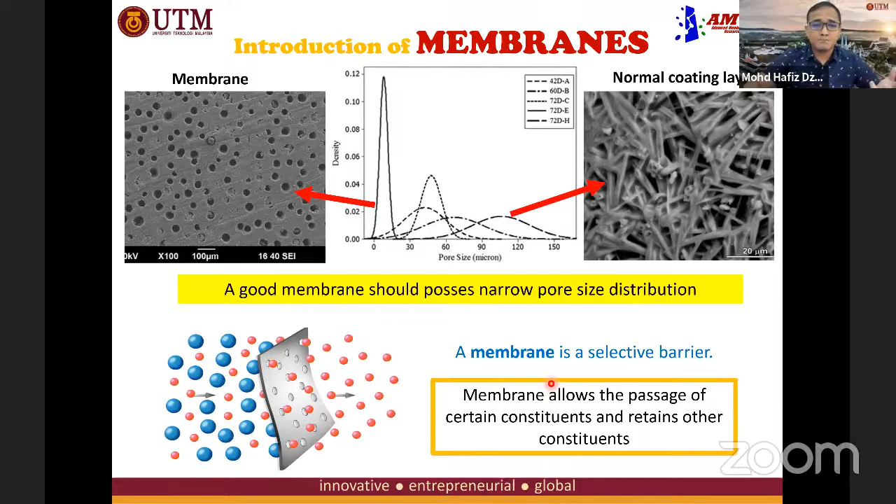Due to its narrow pore size distribution, membrane acts as a selective barrier, meaning that it only allows certain constituents to pass through and retains the other constituents. The concept of a membrane is quite straightforward. The conventional mechanism of membrane is based on filtration. Membrane allows molecules smaller than its pore size to pass through and retains the bigger molecules on the retentate side. Therefore, the pore size of the membrane is really important to make it very selective and increase the separation efficiency.

If you look at the classifications, the most common types of membrane are these 4 types: microfiltration, ultrafiltration, nanofiltration, and reverse osmosis. Microfiltration has the biggest pore size, from 0.1 up to 3 micron, followed by ultrafiltration, 20 nanometer up to 0.1 micron, nanofiltration, bigger than 1 nanometer and less than 20 nanometer, and reverse osmosis, the smallest one, from 0.1 up to 1 nanometer.

It's very, very small. Therefore, reverse osmosis can reject all the molecules in water. Only water can pass through, because the contaminants in water have a bigger molecular size compared to H2O. H2O has the smallest size, so only H2O can pass through, and it will retain all the minerals and contaminants on the feed side.

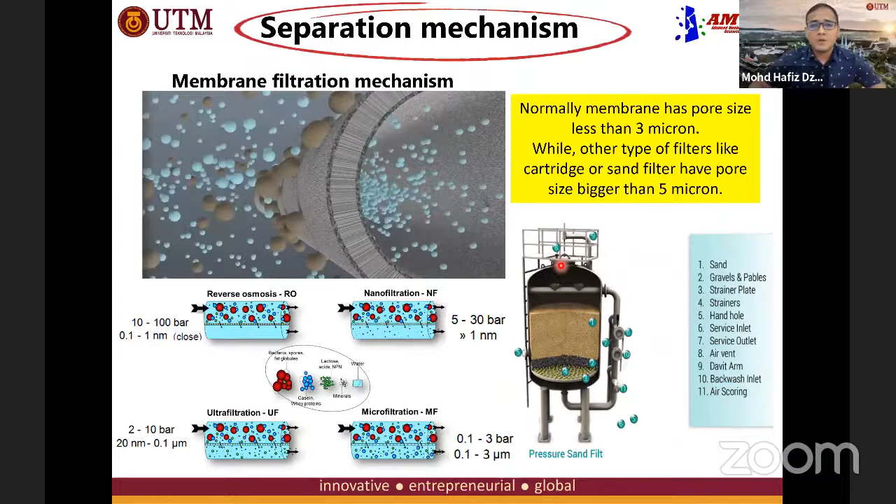We also have another type of membrane, which we call the inorganic membrane. The inorganic membrane is divided into three: ceramic membrane, carbon membrane, or metal membrane. The commercial one is made from alumina and zirconia as well as titania. This is the common material for inorganic membrane, which falls under the category of ceramic membrane.

And there's a new type of membrane. It's not so new, it was invented probably a few decades ago. What we call the mixed matrix membrane. Mixed matrix membrane is a combination of the polymer and the inorganic membrane in order to cater to the disadvantages or drawbacks of both materials. When we mix them together, we expect some synergistic effect between the polymeric and inorganic combination.

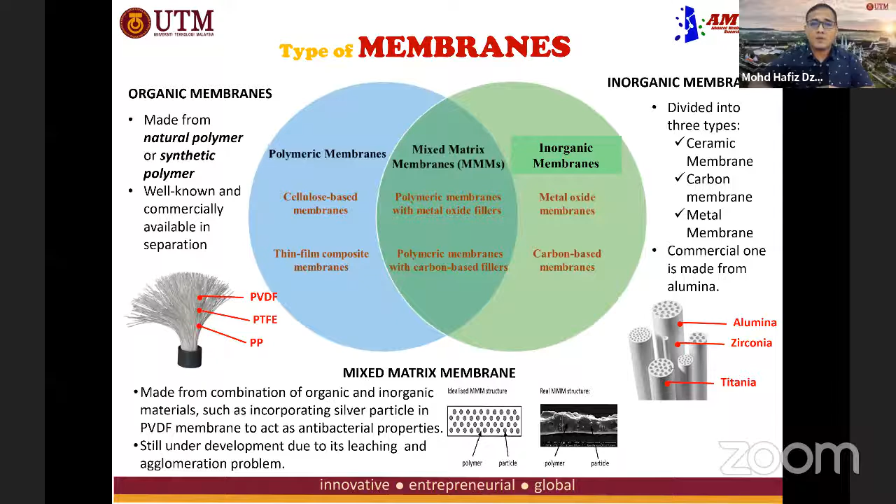But the mixed matrix membrane has not been much commercialized yet due to its leaching problem and also the agglomeration issue. So the two most common membranes in the market are polymeric and ceramic.

For ceramic, it has advantages in terms of its superior mechanical strength and its good chemical and thermal stability, because the nature of ceramic itself is very, very tough. Therefore, the ceramic membrane has a longer operation lifetime. Normally, we can use ceramic membrane up to 20 years, compared to the polymeric membrane, which degrades over time, so we have to replace it periodically. Normally, every 2 up to 4 years, we have to change the polymeric membrane.

But the main shortcomings of ceramic membrane are that it is very expensive and brittle. Because of these two drawbacks, ceramic membrane lacks operational experience in industry. People tend to use polymeric membrane instead of ceramic membrane because of its expensiveness and its brittleness.

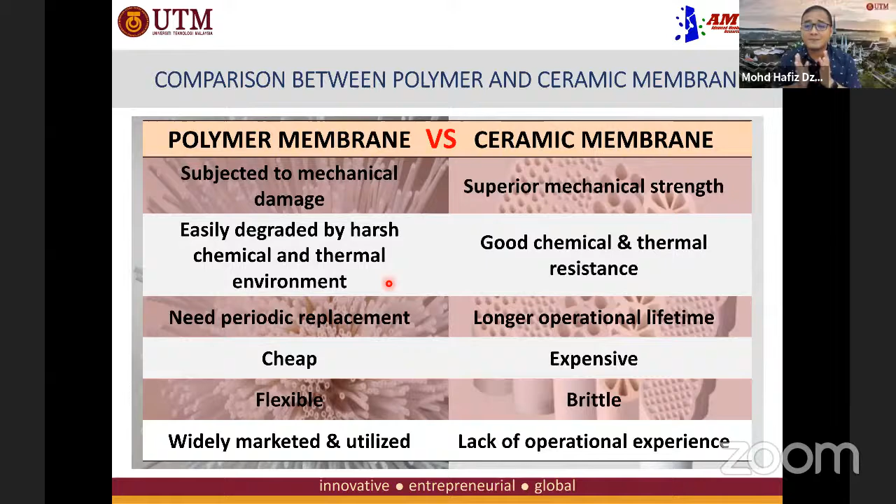The common structure of ceramic membrane is what we call the asymmetric structure. Asymmetric means that the top and the bottom layers don't have the same structure. This normally consists of several layers of one or more different ceramic materials. For example, the thickest layer is the porous layer that gives the mechanical strength and acts as a support for the membrane. That is followed by an intermediate layer. After that, you coat a separation layer in order to alter the pore size of the membrane.

For example, if you would like to produce a microfiltration membrane, the pore size is normally quite big. So probably 2 layers, the support layer and the intermediate layer, are enough to make the pore size within the range of microfiltration. But to further reduce the pore size, for example for ultrafiltration, you probably have to add 1 more layer. For nanofiltration, you have to add another layer. So there are more and more layers if you would like to reduce the pore size of the ceramic membrane.

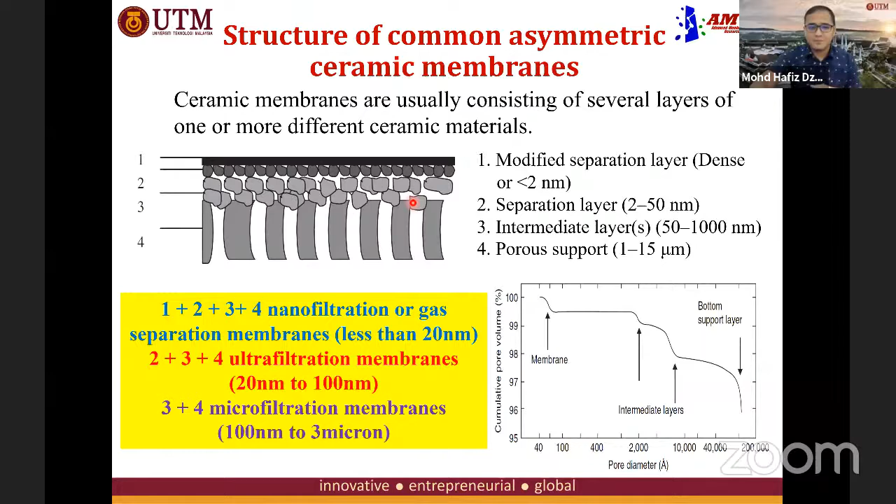The conventional way to prepare the ceramic membrane is a multiple step process like this one. We have the powder mixed with some solvent, and we stir and ball mill to produce the ceramic slurry and paste. After that, we can produce the support precursor. The support is produced by tape casting, slip casting, or pressing. This one is to produce a flat sheet membrane. Flat sheet membrane means it's like a planar membrane.

Okay, and if we want to produce the tubular membrane, we have to use the extrusion process. Tubular means that it looks like a straw, and the size is normally from 5 centimeters up to 10 centimeters. So you have to do sintering after you get the precursor in order to turn it into a strong ceramic body, and after that, in order to alter the pore size of the membrane, we have to do a deposition technique. Either you can use vapor deposition or you can use coating, followed by one sintering.

And this process can be repeated depending on what pore size is desired for your membrane. Okay, the smaller the pore size that you need, probably the more repetitions of this step you have to conduct. Okay.

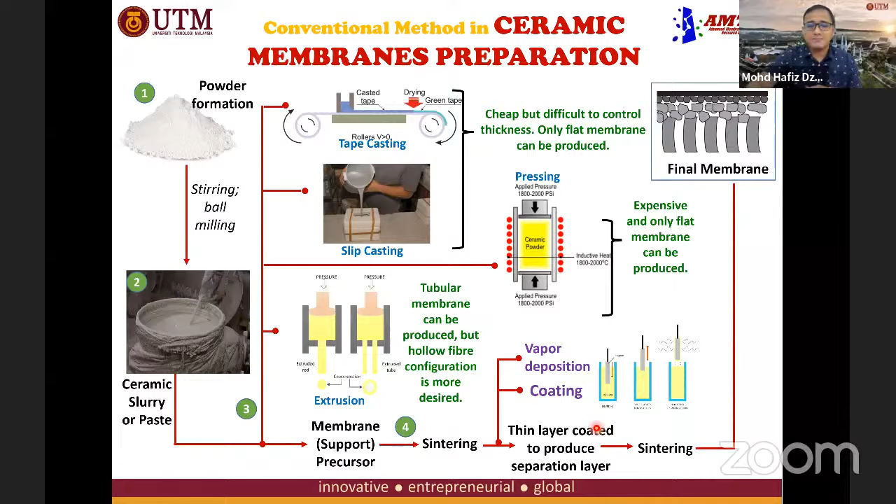So these are a few reasons why the ceramic membrane is expensive. Firstly, the ceramic membrane is made from expensive material. Alumina and zirconia are very expensive, probably 10 times more expensive than polymeric material. And also producing this asymmetric structure takes multiple steps, as I just showed you. We have to do the extrusion, sintering, deposition, sintering, followed by a few more steps in order to get the desired structure. And also the high temperature sintering for commercial materials like alumina and zirconia makes the process to produce the ceramic membrane energy consuming.

And also the configuration of the current ceramic membrane. Normally you can find either flat sheet or tubular commercially available, and these configurations lead to relatively lower surface area. So therefore, strategies to reduce the cost of the ceramic membrane have been proposed by many researchers. You can use alternative materials that are readily available at low cost to replace alumina and zirconia, or we can also use the phase inversion technique to produce an asymmetric structure in a single step. Okay, I will talk about it later.

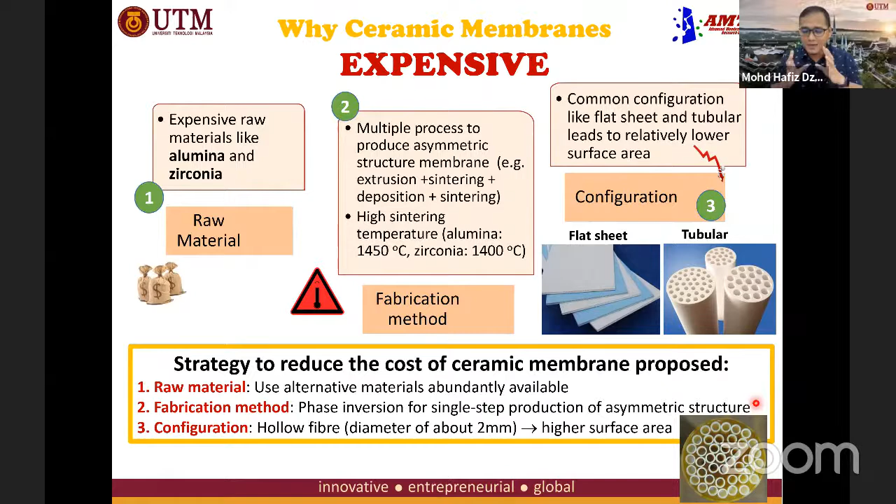And by using this phase inversion, you can produce a structure what we call hollow fiber. This is some picture of the hollow fiber. The diameter is about 2 millimeters, and we can increase the surface area of the membrane by having this type of structure. So this is the dry jet wet phase inversion sintering technique, the technique that is now emerging to produce the hollow fiber membrane.

So by using this technique, the first step is dope suspension preparation. After you get the suspension, you extrude it through the syringe pump, through the spinneret, and it travels some air gap before it reaches the coagulation bath. The external coagulant is normally water. This is the place where the solidification process from liquid to solid happens. Because of this process, what we call the solvent-non-solvent exchange, it leads to the solidification process we call phase inversion.

This phase inversion normally can produce what we call the asymmetric structure in a single step. The asymmetric structure is composed of macrovoids. Normally the structure is like a finger, what we call a finger-like structure, and on the outer there is a sponge-like structure. Okay, so because this precursor also contains some binder, normally we use polymer as a binder, we have to sinter it. During the sintering process, most of the moisture, retained water, polymer, and other impurities will burn off, and what is left after sintering is pure ceramic.

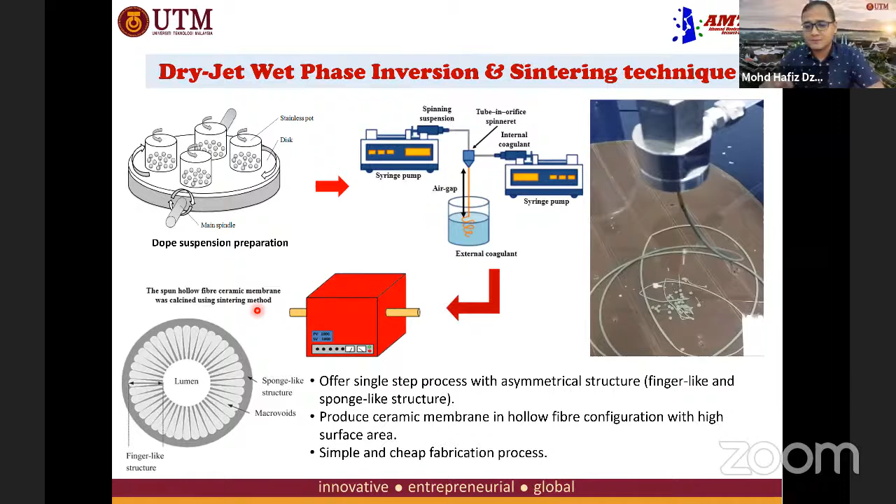So if you look at the publication trend over the years, from 1969, the hollow fiber membrane is not really new. It was invented a long time ago, but publication was very, very slow until the phase inversion technique was proposed to produce ceramic membranes in the early 2000s. So you can see from the early 2000s, publications on hollow fiber ceramic membranes have increased tremendously over the past 20 years. I'm also proud to share that UTM, especially AMTEC, is the main contributor in the world nowadays in this area. We are the leading institution for ceramic hollow fiber membranes.

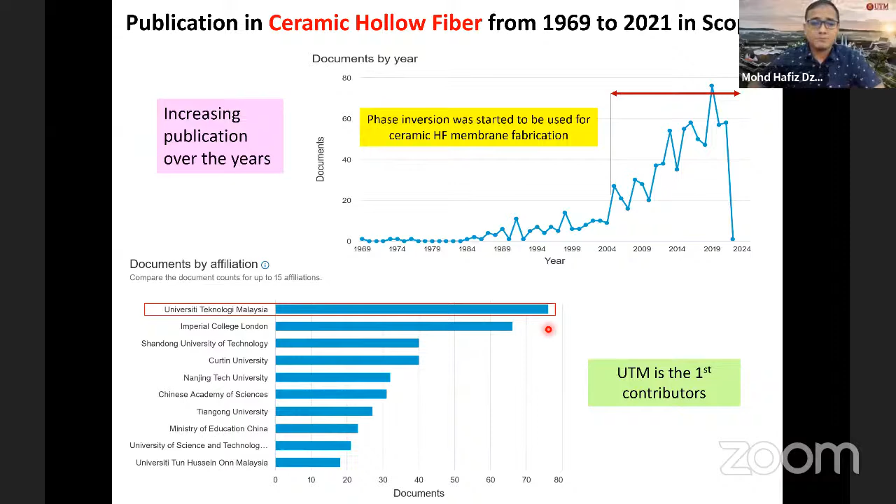So we can subject the ceramic membrane to a number of applications. For example, for water and wastewater treatment: since a ceramic membrane in nature is hydrophilic, it's very suitable to be used in water and wastewater treatment. Because it's hydrophilic, we can capture more water and it can produce higher flux for the membrane. So therefore, the ceramic membrane is very suitable to be used for water and wastewater treatment.

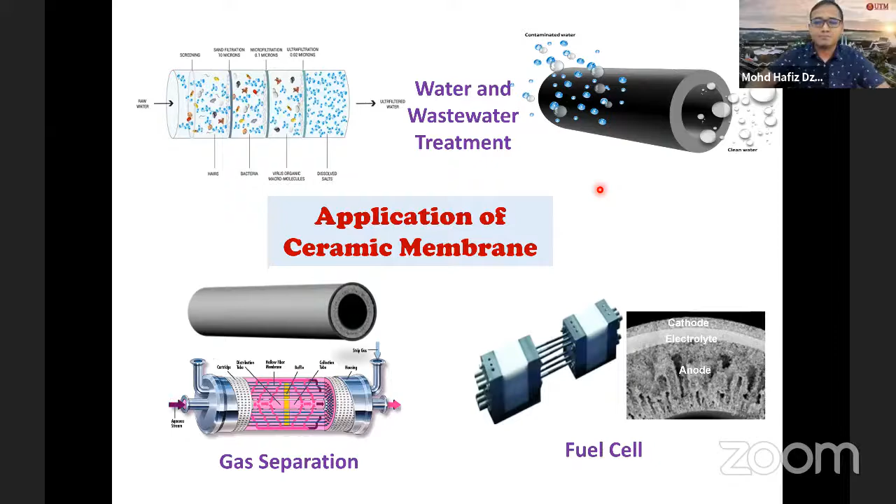And we also can use it for gas separation, either based on the molecular sieve technique or the membrane contactor. We have tried in fact to use this ceramic membrane for gas separation. And in fact, we can use it for the fuel cell as well. So we're going to talk more about fuel cell today, as the topic for today is fuel cell. So the ceramic membrane is very suitable to be used as fuel cell material as well. Now let's have a more detailed look at the ceramic membrane application in fuel cell.

What makes the fuel cell a promising option? People probably have heard fuel cell is a green technology. Yes, it's true, it's green technology. So we can use the fuel cell to reduce the dependency on fossil fuel in order to combat excessive greenhouse gas, which leads to climate change. Climate change is not a myth, it's a real global phenomenon. Because of fossil fuel burning, we release a lot of greenhouse gas, and this greenhouse gas will make our world hotter, and therefore it can raise the sea level.

The sea level rises due to global warming because of the melting of ice sheets and glaciers that add water to the sea, and also the expansion of seawater when the temperature is hotter, so the water molecules become more active and expand a little bit. So therefore, the sea level will rise. Based on data obtained from NASA, the increase is quite high, 3.3 millimeters per year. Just imagine this increase in 100 years, in 200 years. It will probably cause many cities to not exist anymore. So we have to take some action to combat this climate change issue.

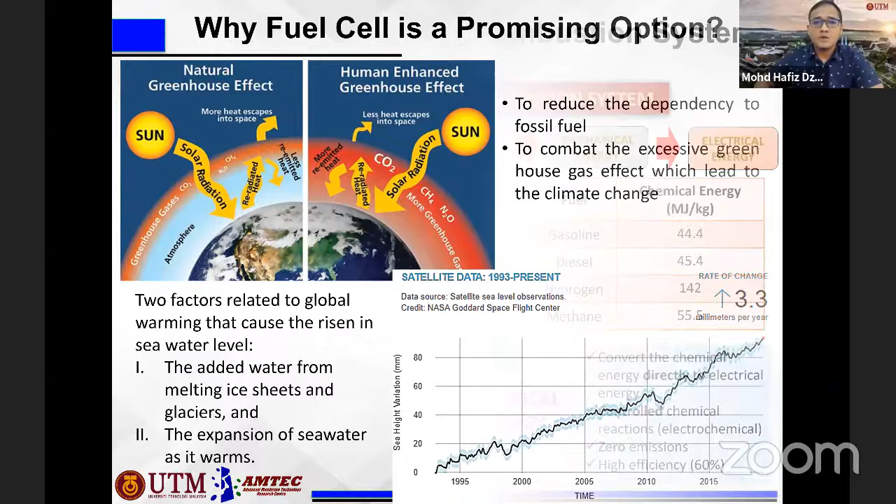If we compare the fuel cell with the combustion system, more than 50% of electricity in Malaysia is based on the combustion system, either from coal, other types of fossil fuel, or biomass and so on. This combustion system involves a multiple-step process, meaning that you extract the chemical energy from the fuel, but you don't convert it to electrical energy directly. Instead, you have to convert it into several types of energy, for example thermal energy, mechanical energy, and eventually electrical energy. Because of the few steps of conversion, there are energy losses in between before it converts into electricity.

This combustion system also produces a lot of toxic gas like NOx, SOx, and particulates. And due to the many conversions, it normally has quite a low energy efficiency. On the other hand, the fuel cell converts the chemical energy directly into electrical energy. For example, the chemical energy of hydrogen is 142 megajoules per kilogram. If we can convert directly with the highest efficiency, with 1 kilogram of hydrogen we can produce a lot more energy compared to the combustion system, because the fuel cell converts chemical energy directly into electricity.

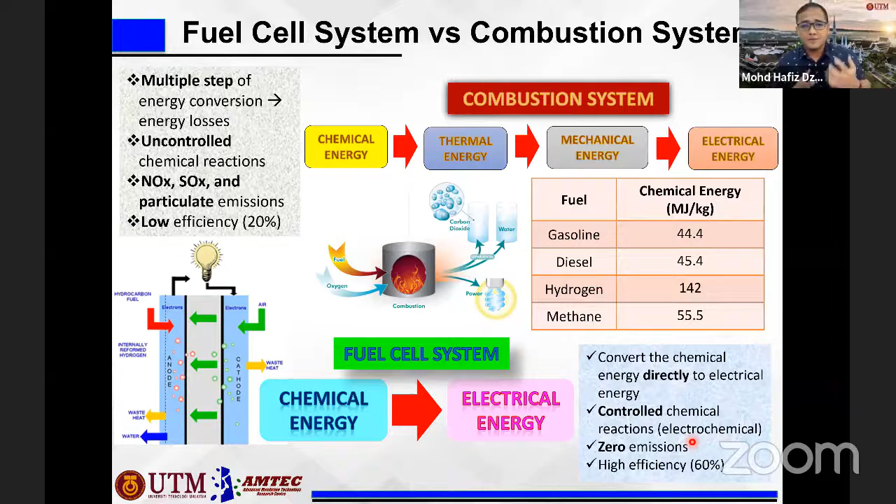There are several types of fuel cells. You have the proton exchange membrane fuel cell, direct methanol fuel cell, and microbial fuel cell; these types use a polymer electrolyte membrane. You have the alkaline fuel cell, which uses alkaline as the electrolyte. You have the phosphoric acid fuel cell, which uses immobilized liquid phosphoric acid as the electrolyte. You also have the molten carbonate fuel cell, which uses molten carbonate as the electrolyte, and the solid oxide fuel cell, which uses ceramic as the electrolyte.

Normally the classification of the fuel cell is according to its electrolyte. For these, the name is according to the electrolyte, but the first three are actually according to the type of fuel used. For example, proton exchange membrane fuel cells use hydrogen. Direct methanol fuel cells use methanol. Microbial fuel cells use wastewater as the feed. So these three depend on the type of feed injected as the fuel.

So for this talk, I would like to focus more on the solid oxide fuel cell, because the solid oxide fuel cell is the only fuel cell that uses ceramic material as their membrane, as their electrolyte.

So what is the solid oxide fuel cell? Normally the operating temperature is from 500 to 1000 degrees Celsius. Because of its ceramic material, it can withstand high temperature operation. Therefore, you don't have to use a noble catalyst like platinum or expensive catalyst like palladium. By having solid oxide fuel cell, we can use cheaper catalyst because of high temperature, and at this temperature, the catalytic activity is more efficient.

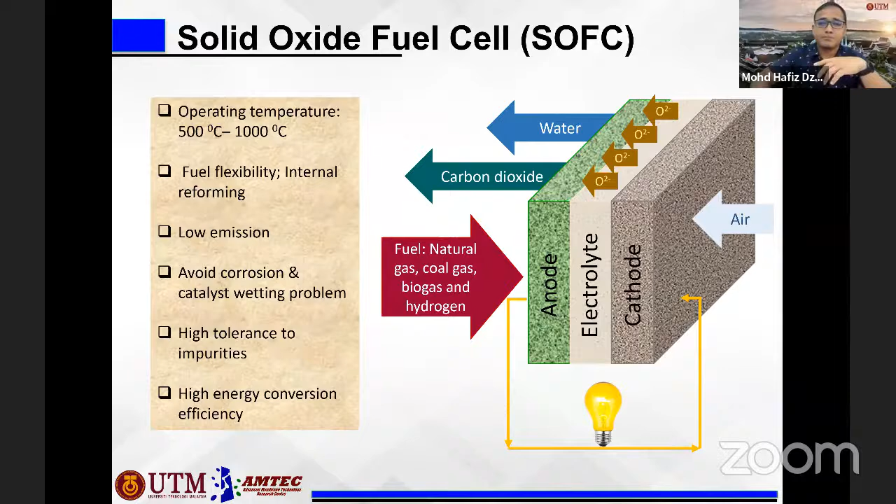So this is how the solid oxide fuel cell works. It's similar to other types of fuel cell or battery. It has three main components: the cathode, anode, and electrolyte.

The oxygen, normally from the air, will react with the electron and break down into oxygen ion. This oxygen ion will travel through the electrolyte, because the electrolyte has to be oxygen ion conductive. When it reaches the anode, it will react with the fuel, and after that it can convert the fuel into electron and H2O. Because it is an exothermic reaction, it will also release some heat.

So the product from this reaction, if you use hydrogen, is purely H2O. Also, because of the movement of the electron from anode to the cathode, it can produce continuous electricity as long as the feed is being supplied.

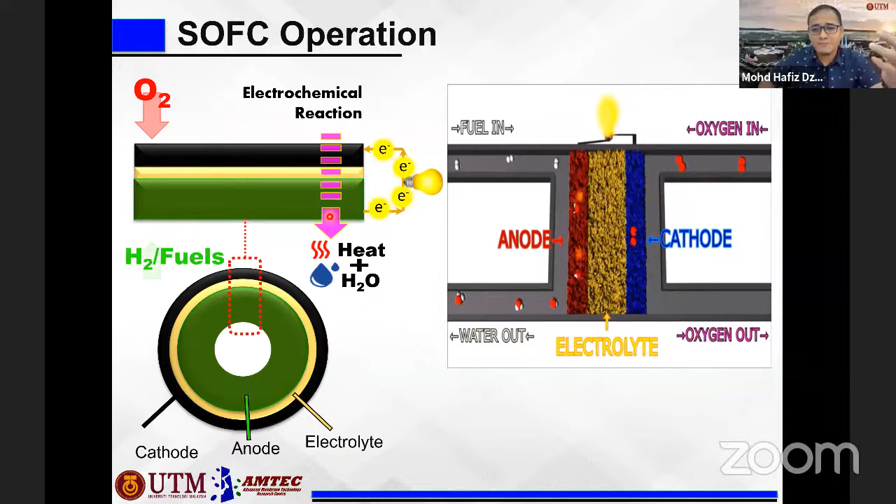So the main characteristics or functions of the electrolyte: it has to be ion conductive, and it has to act as the separator between the fuel in the anode and the oxidant in the cathode. The characteristic of a good electrolyte, which we also call a membrane,

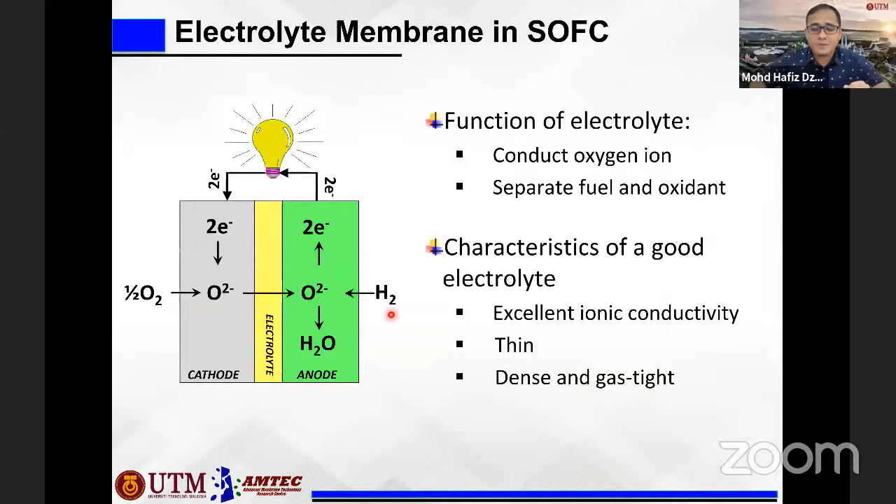it has to have excellent ion conductivity. It has to be thin, and also dense and gas tight, so that the gases from both anode and cathode will not mix together. Therefore it must be gas tight and dense.

The normal configurations of solid oxide fuel cell: it can be found as electrolyte supported, meaning the electrolyte is the thickest part. Or it can be found as anode supported, meaning the anode is the thickest one, or cathode supported, meaning the cathode is the thickest part. But the most common configuration is the anode supported.

This is because normally the anode material, nickel or nickel oxide, as the precursor material for fabricating the anode, is the cheapest material compared to the material for electrolyte and cathode. Therefore, having the anode as the thickest part, we can reduce some costs for the electrolyte and cathode because we use a very small amount of them. Also, because of this anode-supported design, it can reduce the ohmic resistance which comes from a thick electrolyte. If you have a thin electrolyte, you can reduce the ohmic resistance.

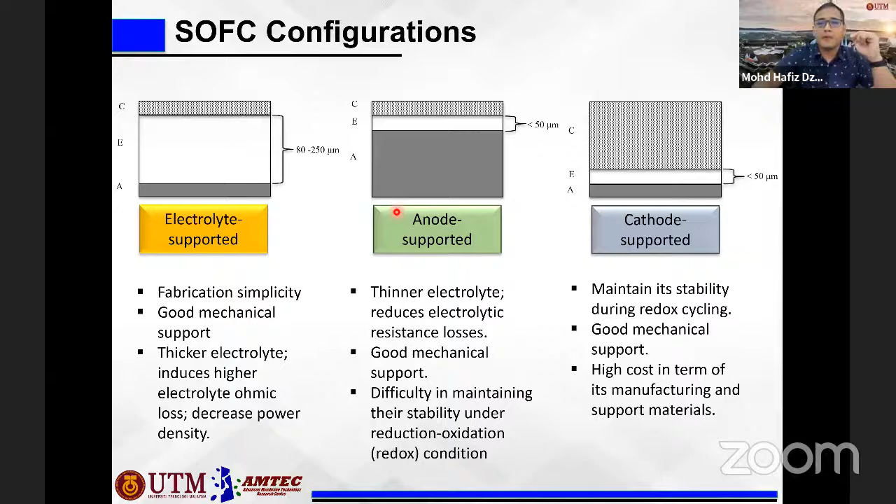The configurations of the SOFC, or the types of SOFC, you can find as a planar, as a sheet, or as a tubular. Tubular is like a straw, with diameter from 3 to 10 centimeters, or it can be found in a smaller version, what we call the microtubular, normally lower than 5 millimeters in size.

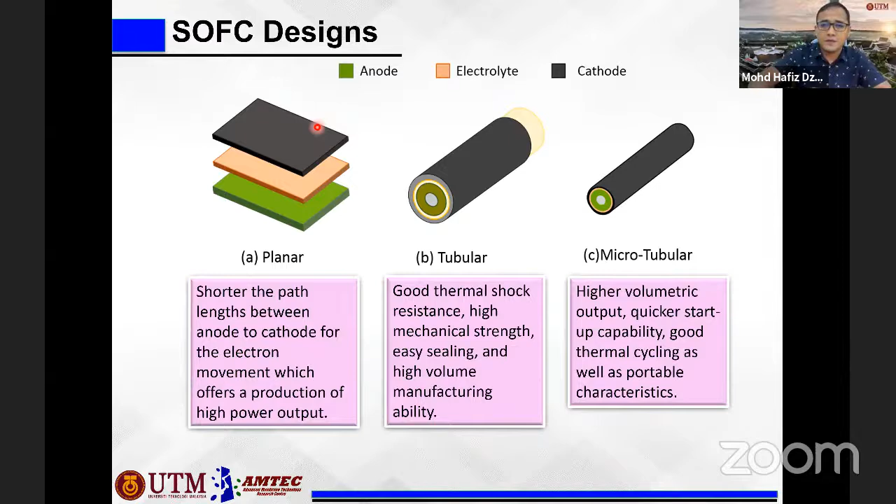So where can this solid oxide fuel cell be applied? We can apply it for stationary use, for example in residential areas or biogas plants. For example, in Indonesia you have a lot of palm oil mill effluent that produces biogas during wastewater treatment. This biogas can be converted into electricity using solid oxide fuel cells and used inside the plant.

We also can combine them with a gas turbine. As I mentioned earlier, the solid oxide fuel cell reaction is exothermic and produces a lot of heat. Therefore we can combine them with the gas turbine in order to boost up the efficiency of the energy production, and this can replace the combustion system.

And if we can produce a small size, in fact the solid oxide fuel cell can be used in mobile applications. For example, we can use liquid fuel to power small equipment like a laptop or a light, and so on.

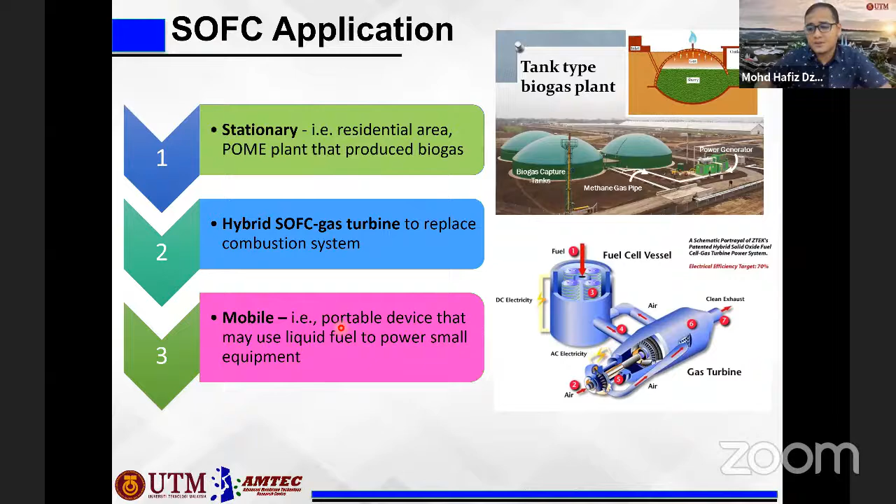This is the commercially available solid oxide fuel cell for residential application. You can see here from the left side, it is the planar solid oxide fuel cell, with power like 1 kilowatt. This can probably power up half of the house.

On the right side, we have the solid oxide fuel cell combined with heat and power, and this is an anode-supported tubular cell. This can produce 0.7 kilowatt of electricity. So by having these small versions of solid oxide fuel cell, we can power the whole house.

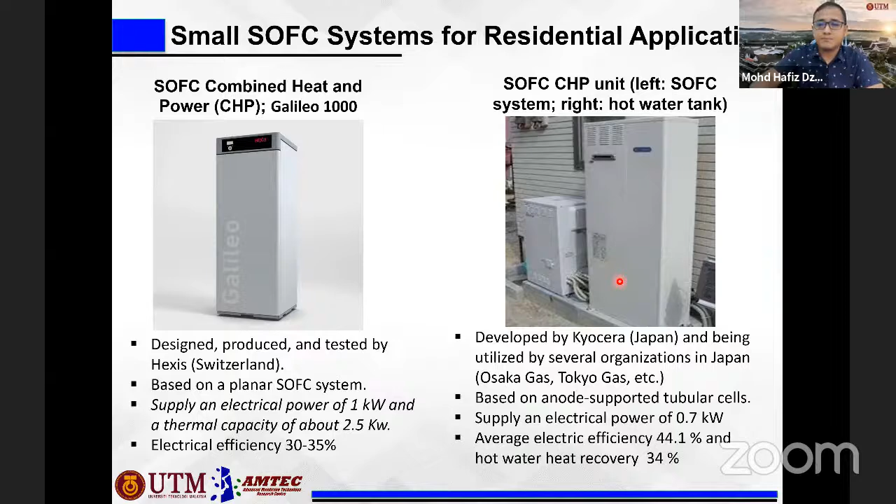The good thing about fuel cells as well is that you can scale it up, depending on the desired output unit. For example, one size of SOFC here can generate 100 kilowatts of electricity. So if you'd like to have 500 kilowatts, you just install 5 units of the same SOFC system, like has been done at the eBay headquarters.

And in fact, like I mentioned, we can use it for portable applications. This is an example of a portable SOFC where we just power them using propane. You can use it for ground sensors, unmanned aerial vehicles, and also robot pickers. It can also use LPG. We can use it for military missions and also off-grid power for electronics, radio, and computers.

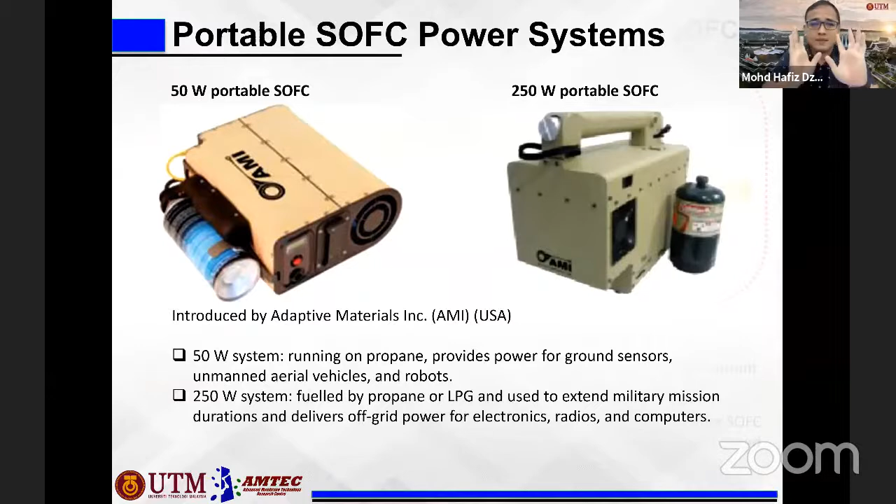So I'll try to take another 10 to 15 minutes to just give some overview about the microtubular solid oxide fuel cell, especially on the research that has been conducted at AMTEC.

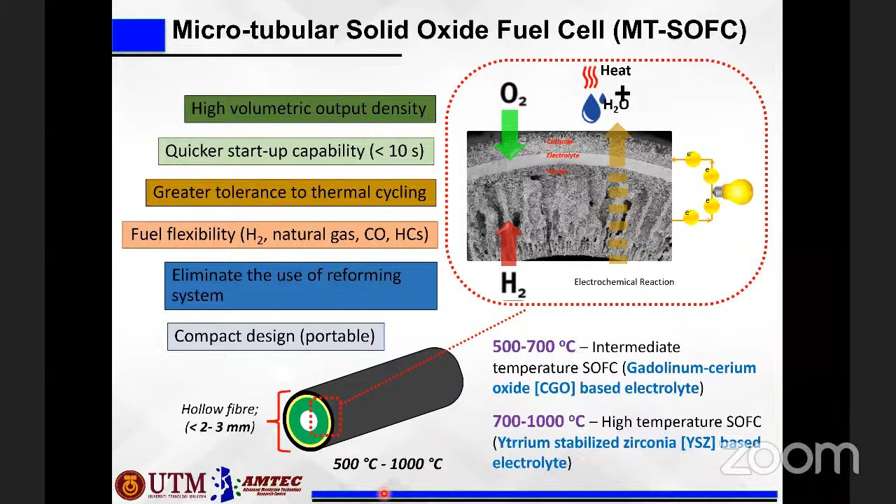As I mentioned, the hollow fiber membrane is similar in structure to the microtubular solid oxide fuel cell, with a diameter of only 2 to 3 millimeters. We can use it between 500 to 1000 degrees Celsius. If we choose to operate at 500 to 700, meaning it is in the category of intermediate temperature, we can use the gadolinium cerium oxide, CGO-based electrolyte, depending on the type of material. If you would like to use a temperature of 700, we can use a different type of material, like the yttrium stabilized zirconia electrolyte.

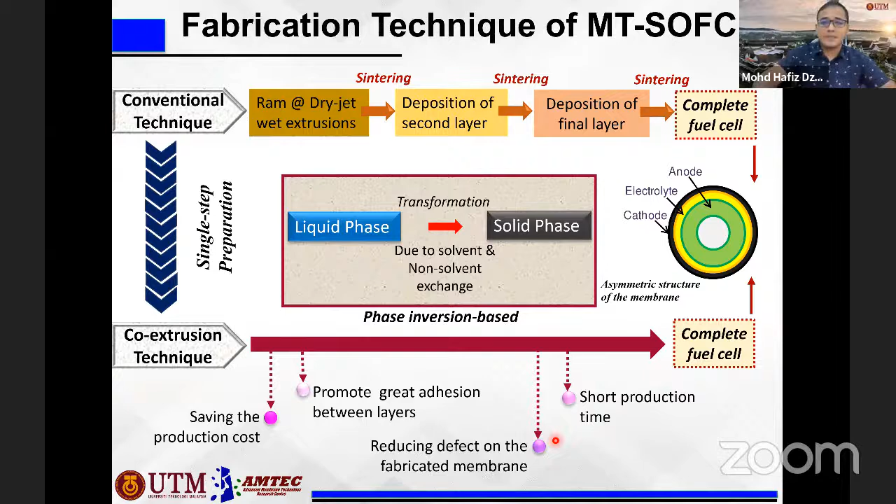But we actually introduced a technique to produce a fuel cell in a single step, meaning we can produce 3 components simultaneously using a co-extrusion technique. With this technique we can save a lot of production cost, promote great adhesion between layers, reduce defects on the fabricated membrane, and shorten the production time. This is similar to how we produce hollow fiber membranes.

First is the phase inversion based co-extrusion technique. Instead of having one ceramic suspension extruded through the spinneret, if you would like a 2-layer or 3-layer, you have to multiply it, meaning you can inject the electrolyte layer and also the cathode layer simultaneously in order to produce the triple or dual layer.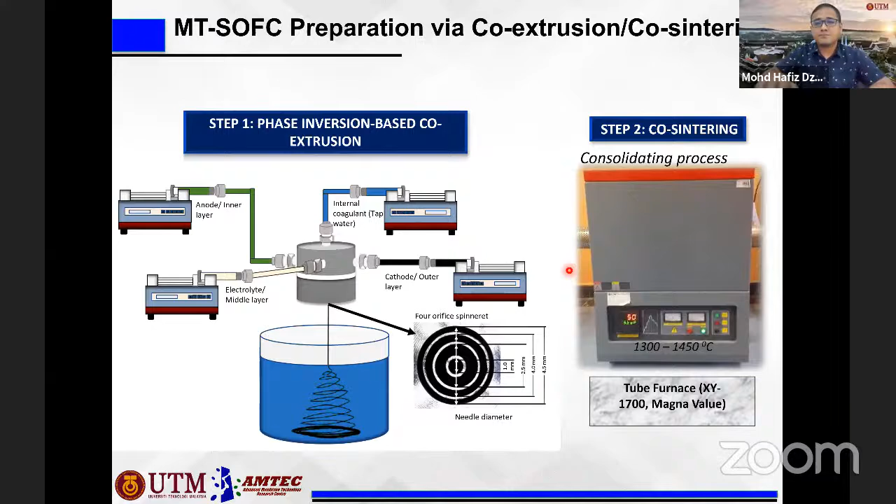So in order to test the membrane or the fuel cell, we have to make it into a reactor and assemble it. We connect it with a silver wire as the current collector and so on before inserting it into the furnace, and we can measure the power density of the membrane of the fuel cell.

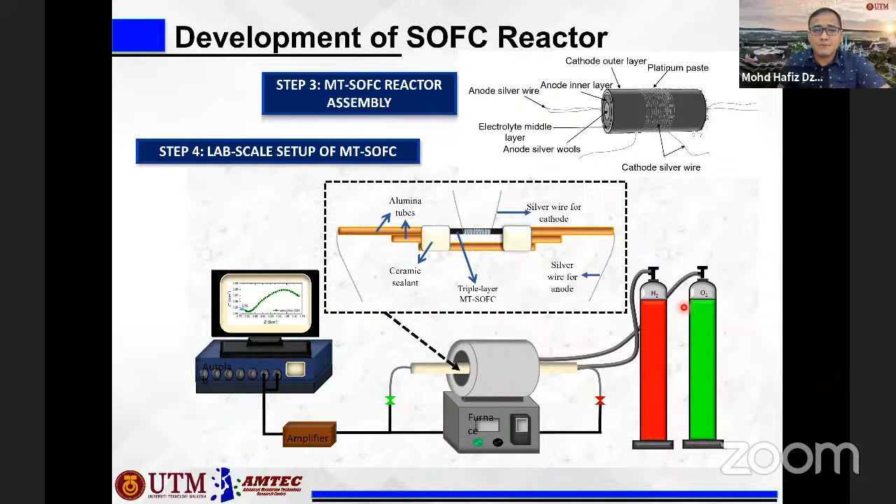So in AMTEC, this is some of the evolution we have done for research on solid oxide fuel cells. We started with the first 3 phases on the dual layer hollow fiber membrane, then in phase 4 we moved to the triple layer hollow fiber membrane, and in phase 5 we tried to use methane as the fuel. For the first 4 phases we used hydrogen only, but for the last one we tried methane to prove that the microtubular solid oxide fuel cell can also use hydrocarbon fuel.

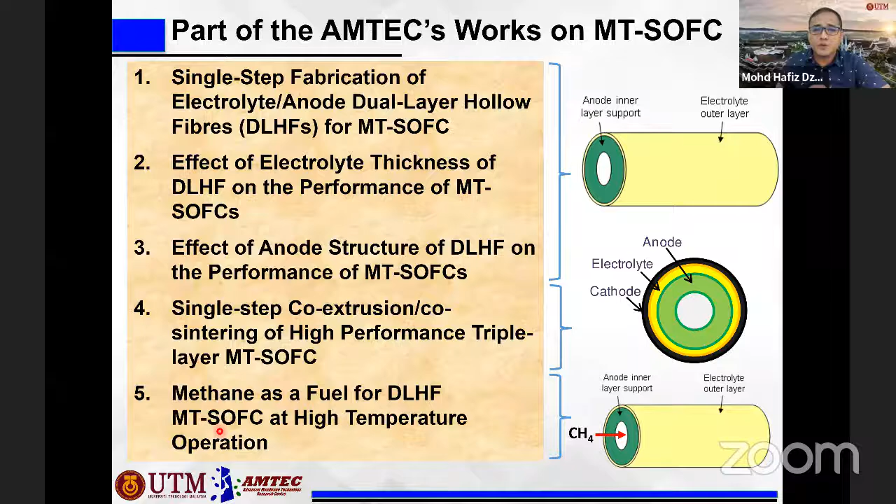So for the first phase, the objective is to produce a defect-free dual layer hollow fiber membrane, which consists of the electrolyte and anode. This is the fixed parameter that we use for the anode and electrolyte.

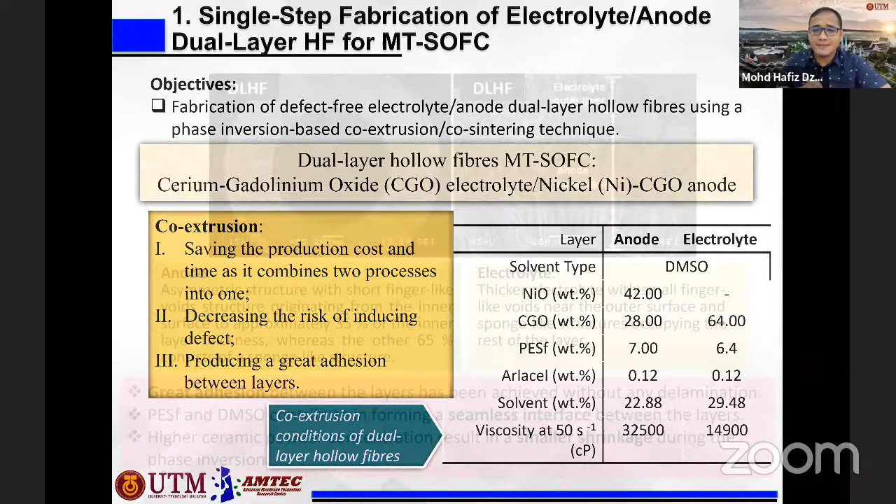In terms of structure, using the dual layer has advantages because it can produce great adhesion between layers without any delamination. The issue with ceramic material, especially for multi-layer structures, is always associated with delamination, meaning the inner and outer layers have different thermal expansion, which can create cracks. But because we use the same polymer binder and the same solvent, the interface between the layers is seamless, meaning we cannot see much difference between the electrolyte and anode layer.

So the electrolyte you can see here is much thinner than the anode layer, and in the anode layer you can find some finger-like structures. That's what we call the asymmetric structure.

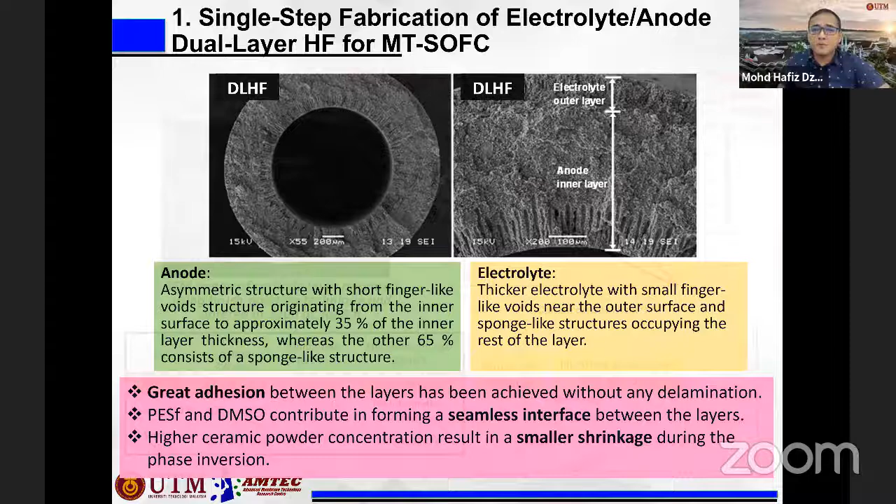So from the dual layer, in order to get the data for the complete fuel cell, we have to add the cathode layer using a brush painting technique. We do this manually, and then sinter it at 1200 degrees.

We measure the fuel cell at temperatures from 550 to 600. For the fuel cell, the most important thing to see from the result is first the maximum power density, which is the multiple of the voltage and current density, giving us the power density.

So you can plot this data. Based on this data, the highest peak is what we call the maximum power density. And the open circuit voltage is where we get the voltage when there is no current being withdrawn from the fuel cell, meaning the fuel cell is still disconnected.

The theoretical OCV, open circuit voltage, for the fuel cell is 1.1 based on the Nernst equation, but what we got here is almost 1, meaning this indicates that the electrolyte we produce is quite dense enough.

If we look here, the power density we produce at the highest temperature, 600, is 0.69 watts per centimeter square. Compared with literature, this temperature is still quite low. So we tried to find an alternative to further increase the power density of the fuel cell, because the higher the power density, the better the performance of the fuel cell. So we tried to reduce the thickness of the electrolyte.

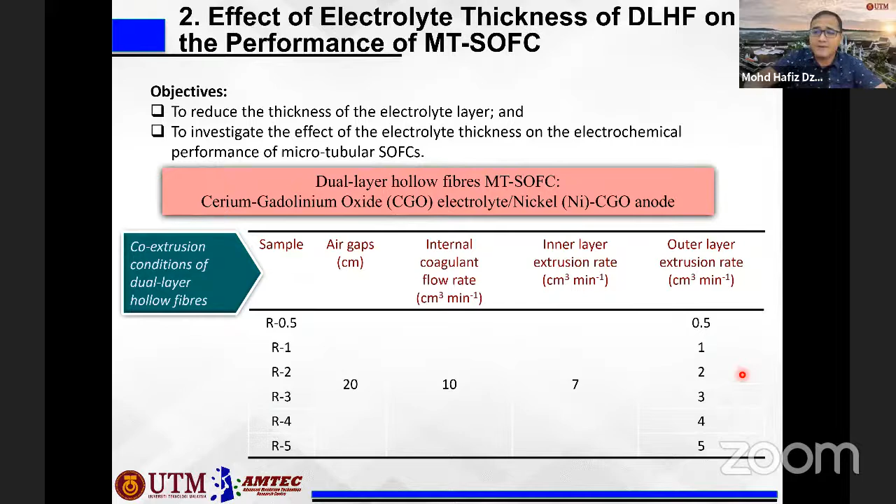The good thing about the co-extrusion process is that we can adjust the structure and the dimensions of the fuel cell accordingly. If we want to reduce the thickness of the electrolyte, we can alter the extrusion rate from 5 up to 0.5 ml per minute. By varying the outer layer extrusion rate, we can produce different electrolyte thicknesses, from 7 micron up to 10 micron.

By further reducing the electrolyte, we can increase the power density to 1.11 watt per centimeter square. This is because with a thinner electrolyte, the oxygen ions that transfer from cathode to anode have a shorter distance to travel. So we can produce a lot more oxygen ions in the anode to react with the fuel, and therefore produce more electrons. When more electrons are produced, more power can be generated.

Based on the comparison with literature, our performance of 1.11 is a little bit reduced compared to the literature. So how to further improve? We can alter the anode structure by mixing ethanol and NMP as a solvent in our dope suspension, because ethanol is considered a poor non-solvent. Increasing the amount of ethanol in the solvent increases the viscosity of the suspension. When the viscosity increases, phase inversion is less likely to happen, or it happens only in a very small part.

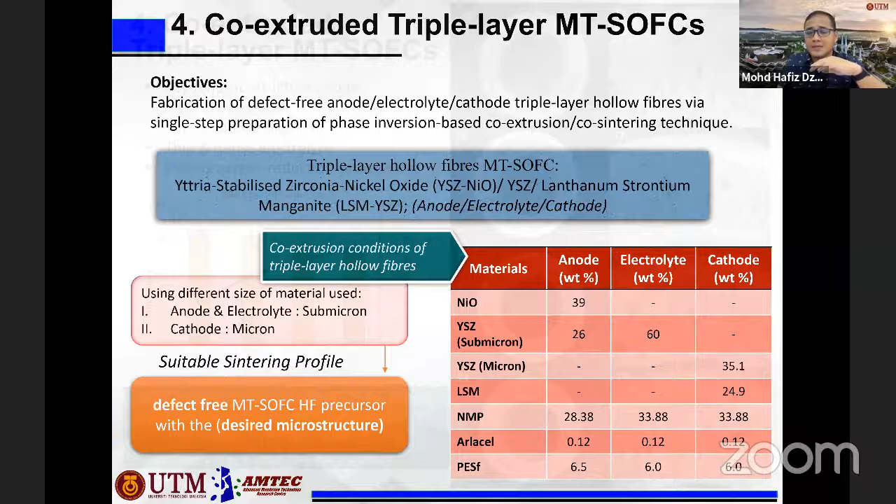We also fabricated a triple layer hollow fiber membrane, but this one is for higher temperature. We use yttria-stabilized zirconia as the electrolyte. We fix everything and vary the sintering temperature from 1300 up to 1450: T1 is 1300, T2 is 1350, T3 is 1400, T4 is 1450. The structure is almost the same, but it becomes denser at high temperature. The mechanical strength increases and the thickness shrinks, because at high temperature the grains become closer to each other.

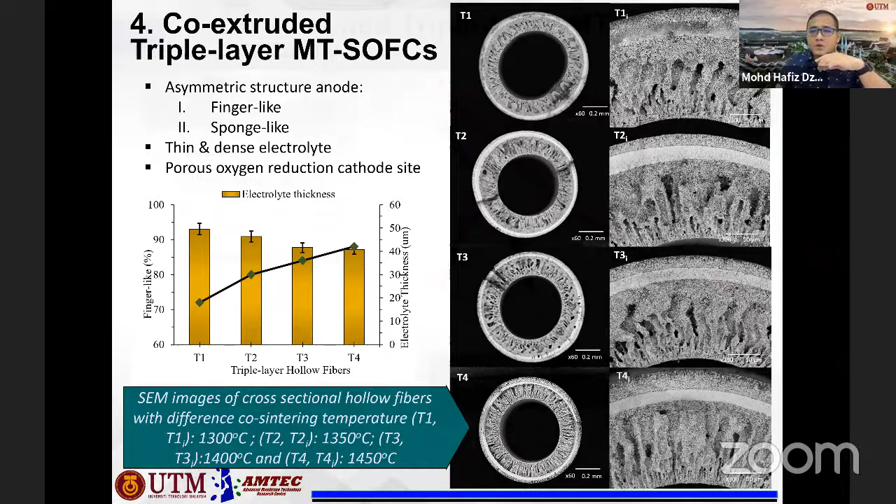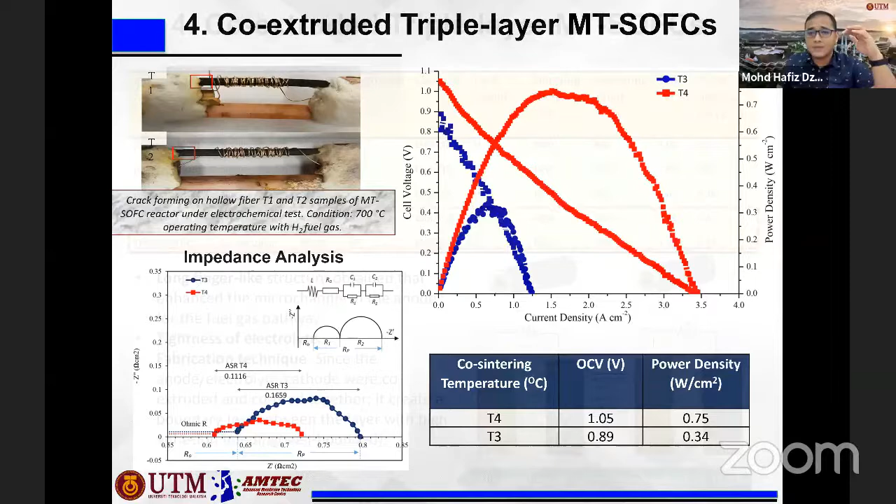Because T1 and T2 were sintered at lower temperature, the ceramic hollow fiber is quite brittle, so we couldn't perform fuel cell tests on those samples. We only tested T3 and T4 and obtained 1.05. Compared with literature at the same operating temperature, ours is a little bit higher. For example, Yang et al. 2009 at 700 produced 1.02, while ours is 1.05. In fact, our power density is also much higher, 0.75 compared to their 0.29.

Why is this? Using a phase inversion co-extrusion process, we can produce a tight electrolyte and a very seamless, boundaryless layer between the anode, electrolyte and cathode. Therefore, when the oxygen ions or electrons jump from one side to another, they don't face any resistance because they can move very smoothly.

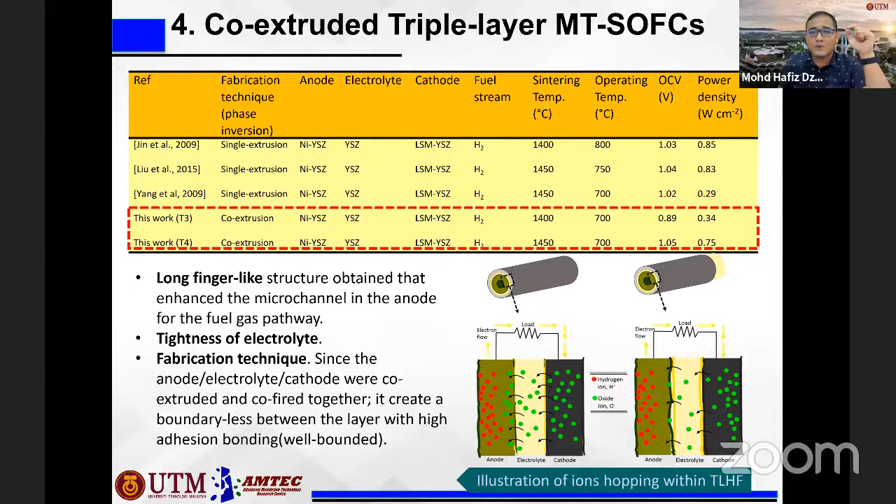Lastly, we used the dual layer hollow fiber membrane with different electrolyte thicknesses and tested it with methane as the fuel.

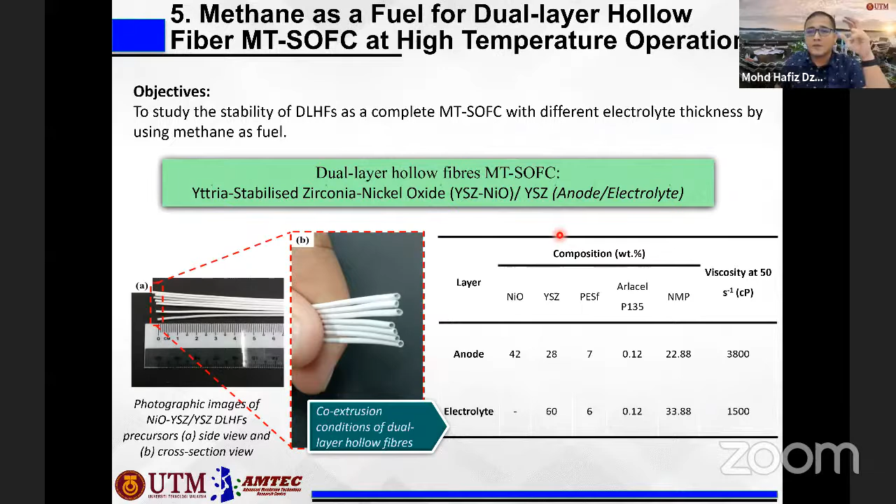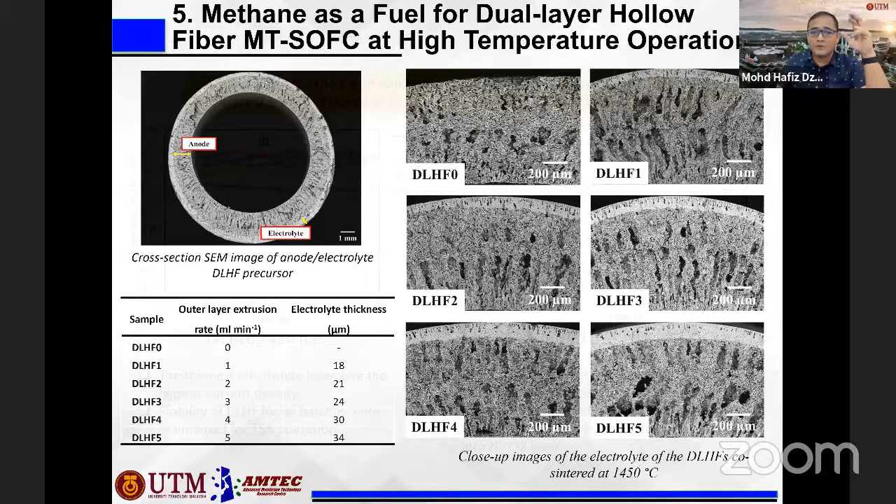So this is the thickness when we vary the extrusion rate from 0 to 5 mL per minute. So we can also get various electrolyte thicknesses. So we apply it for hydrogen and compare with methane. Okay. The result has some trend, but it's not fantastic, I can say to you. For hydrogen, we can see that the cell with the thinnest electrolyte has the highest current density. The thickest electrolyte has the lowest current density, and the performance is stable throughout the time.

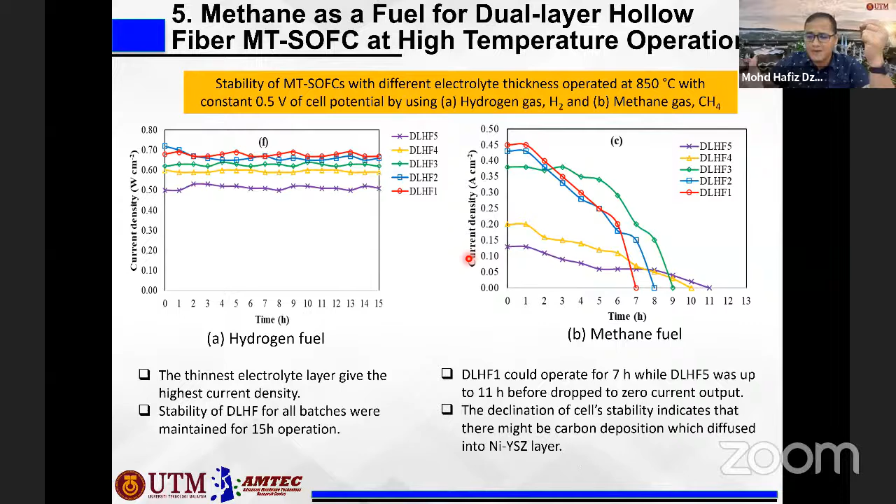Okay, meaning that it can operate for a longer time with hydrogen. But when you use methane as the fuel, you can see that the thinnest electrolyte has a shorter lifetime. It drops very fast, and it can extend the lifetime a little bit when you have a thicker electrolyte. Okay, so this is because carbon deposition takes place when you have methane. Because normally for the anode you use nickel, and nickel is very prone to carbon deposition when you have hydrocarbon fuel as the feed.

Okay, so when you expose it to hydrogen, the structure is still the same because there is no carbon deposition. But when you expose it to methane, carbon deposition will take place, and it will cause structural changes on your anode, and therefore it will cause cracks in your cells. Therefore, after a few hours, your performance has already dropped.

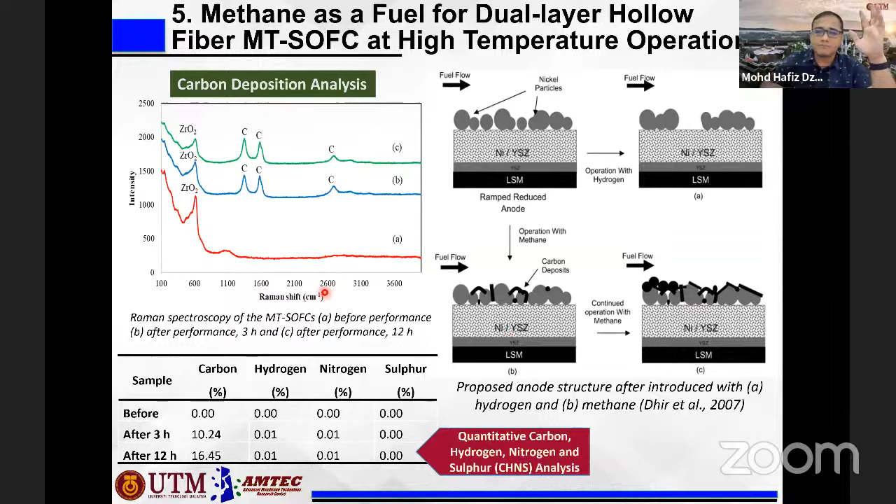Or we can replace or composite the nickel with an alloy or cerium oxide. Or alternatively, we can change the nickel directly to titanates, chromates, manganites, or vanadates, okay, as the alternative anode material. But these types of material are normally more expensive than the nickel type. That is another limitation.

So as the conclusion, what I can say from my experience, the fuel cell can offer a wide range of applications because it is fuel flexible, not like a proton exchange membrane fuel cell. A proton exchange membrane fuel cell can only use hydrogen as the fuel. But for a solid oxide fuel cell, you can use many types of fuel. In fact, you can turn carbon monoxide into energy by using a solid oxide fuel cell. And therefore, it can be further enhanced in terms of energy conversion if we combine it with a heat and power system. And for SOFC also, we can generate higher electricity if we combine it with a turbine.

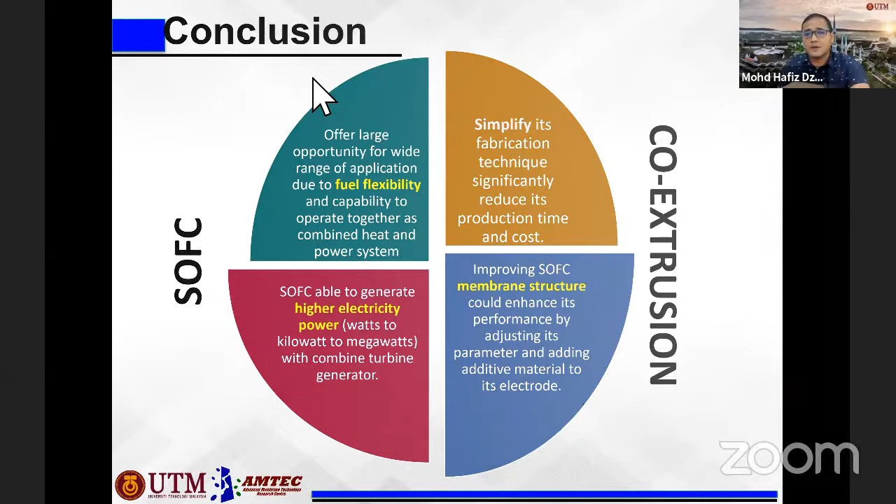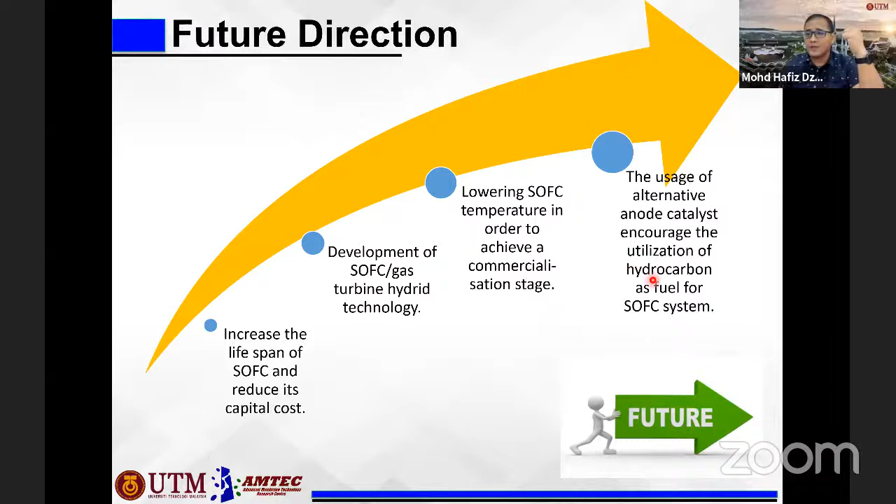Some future directions, this is a very short one. So if you would like to focus research on fuel cells, especially solid oxide fuel cells, these are the areas that we can further improve. For example, to increase the lifespan of the SOFC and reduce its capital costs, and also the development of hybrid fuel cell technology with the turbine. And also we can further reduce the temperature of SOFC. For example, now normal operation is probably from 500 to 1000 degrees Celsius, but if we can further reduce it to 300, it can be a more interesting and promising technology. And also we can use alternative anode catalysts to encourage the utilization of hydrocarbons as the fuel for solid oxide fuel cells. And with that, thank you.

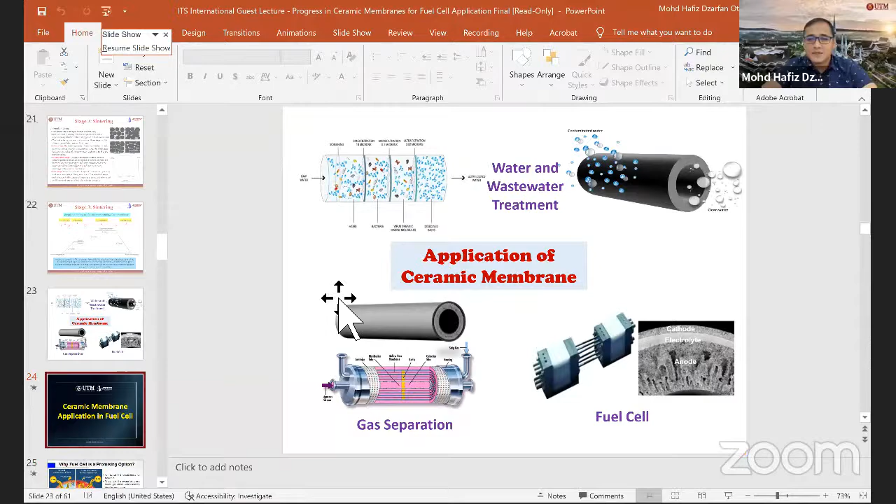Okay, thank you, Ari, for a very good question. So let me give some idea how the fuel cell works, especially inside the anode. Okay. Yes, I agree with you. Asymmetric structure is not the only structure that can be produced by phase inversion. Because with phase inversion, like I told you, we actually can reduce the finger-like or we can extend the finger-like length. It depends on the parameters that we try to manipulate during the fabrication process.

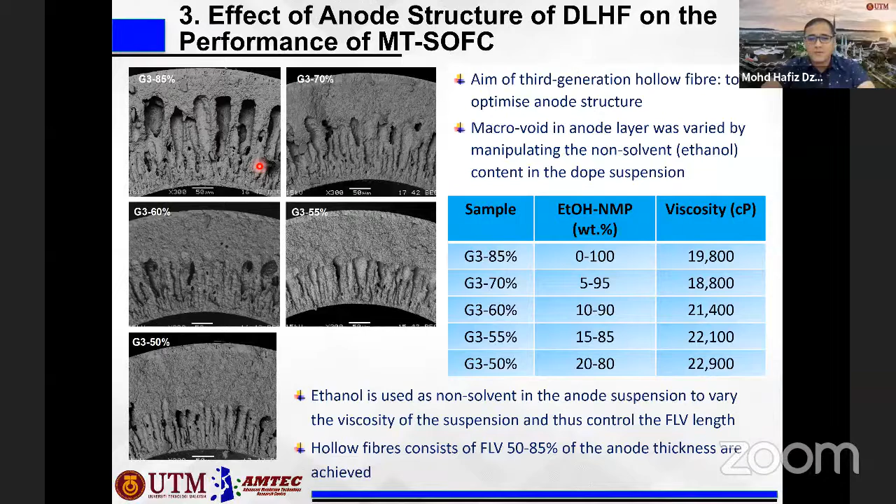But the drawback of the finger-like is that it can reduce the mechanical strength of the membrane, because the finger-like is actually a defect. This macro-void can be called a defect. So if you have too many defects, it will reduce the mechanical strength. Therefore you have to keep it at the ideal amount and ideal length for the finger-like in order to produce a good flow of fuel.

Why we need to have a finger-like is because when we flow the fuel inside the anode, just imagine there is no finger-like, there is only sponge-like structure. We don't apply too high pressure for the feed to travel inside the anode, we apply just nice pressure. So with the applied pressure, the fuel probably cannot reach the inside area of the anode. It can only reach the outer layer, or probably a few microns from the surface. So with a very small area for the reaction to take place, much of the anode area will not be utilized, and it cannot produce more electrons.

But if you have the finger-like, we expect that it can have a vortex flow, meaning that the fuel will go inside the finger-like and disperse throughout its boundary, so the fuel can reach more area in the anode. By having this type of mechanism, we expect that the area deep inside the anode can also provide some reaction, and therefore it can produce more electrons. So we can have higher power density. This is what we predict, we hypothesize, from the structure.

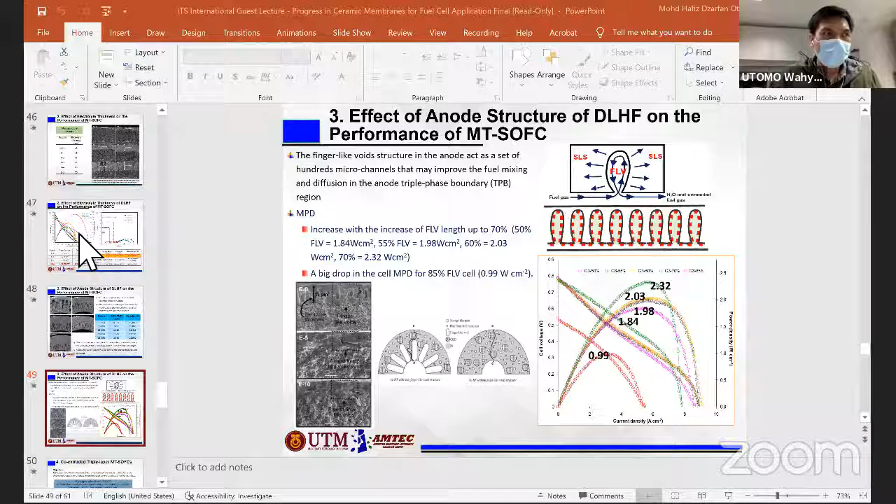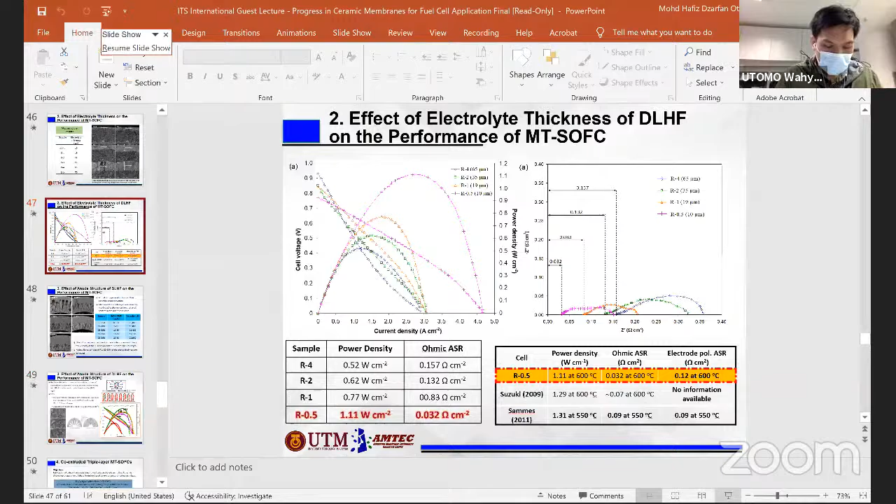Between all of these parameters, for example, substrate resistance, we have the resistance from the substrate itself, the resistance within our catalyst itself, and maybe with the electrolyte. What's the main factor we need to be concerned about when we do measurements? Okay. Thank you, Wahyu.

Okay, I can give you some ideas related to solid oxide fuel cells. I'm not very expert in impedance or electrochemistry, but I will share based on my understanding. For impedance, in a fuel cell there are three types of polarization: first, the ohmic resistance; second, activation polarization; and third, concentration polarization. Based on the impedance, normally you can measure the ohmic resistance, which comes from the conductivity, either from the electrolyte, the anode, or the cathode.

So when you see here, the first intercept of your impedance data represents the ohmic resistance. The ohmic resistance comes from the conductivity of the anode, electrolyte, and cathode. But since we use a very good conductive anode, nickel, the conductivity is like 10,000 or more. And for the cathode we use a perovskite structure, which is a very good electron conductive material. So the only thing that gives a high resistance is the electrolyte.

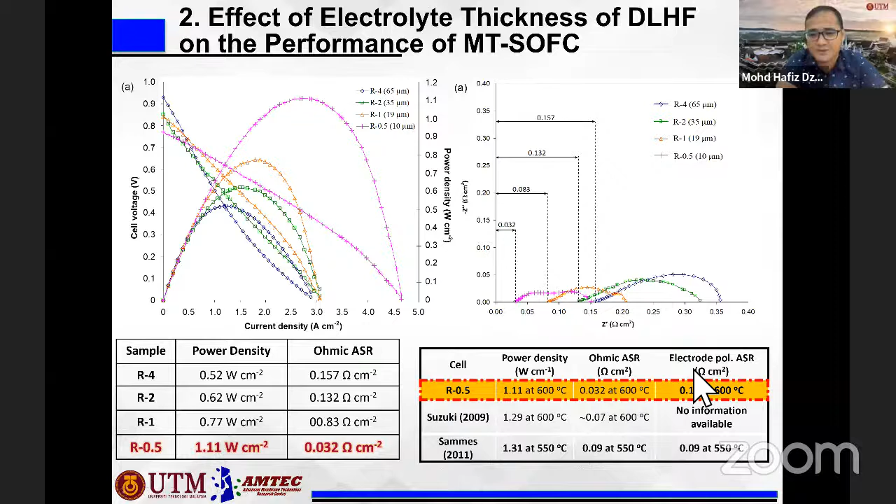Oh, thank you, Professor Hafiz. Then I think indeed we need to consider our system itself and our catalyst system, which may have more influence in our system, so we can predict ourselves. I mean, if you would like to measure the conductivity, I think the first intercept is the most important one. The distance between the axis and the intercept will indicate your conductivity.